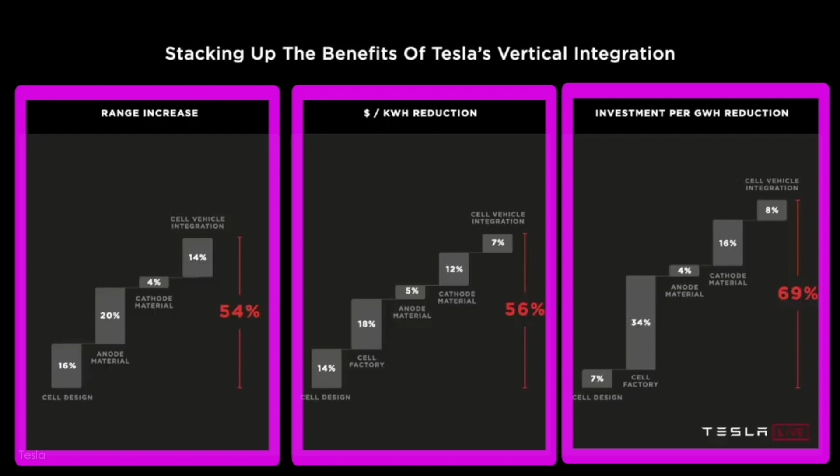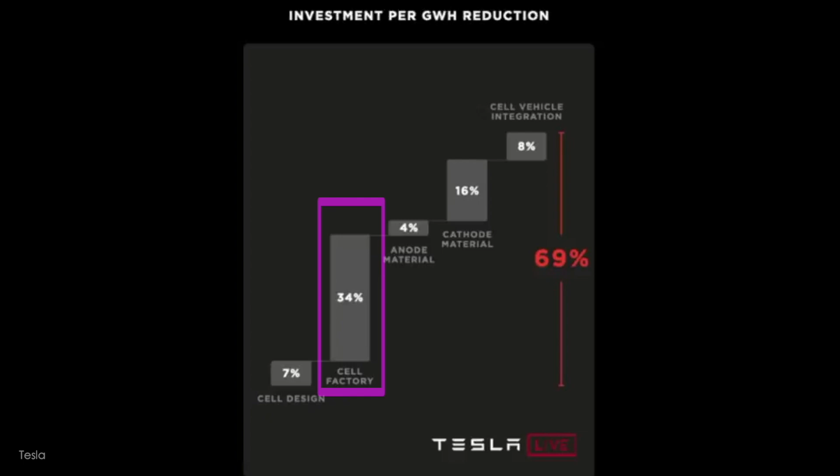But today I wonder how those men and women of 2020 didn't come to understand that Tesla was about to disrupt the energy world by cutting the price of batteries in half, doubling its range, and reducing the investment per gigawatt hour by 69%. This last point, talked about much less, is crucial. With the advances of Battery Day, the investment for new cell factories is over 2/3 cheaper, and the factor that contributes the most to this is the battery factory itself.

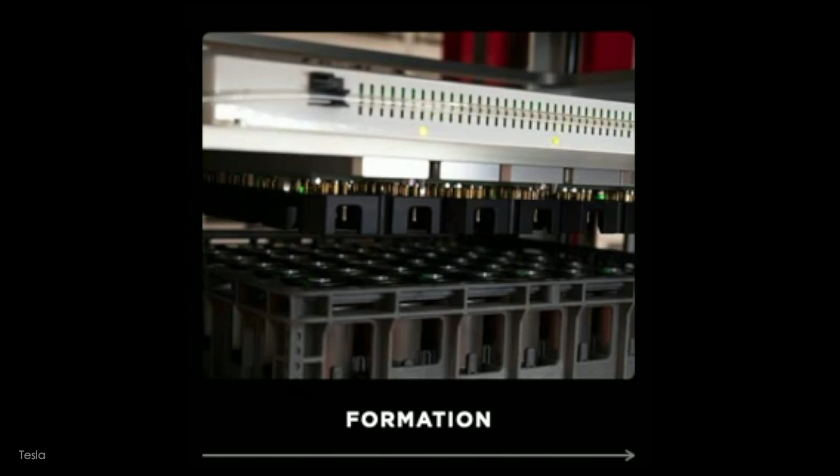In it, the process to make a new cell begins with the manufacture of the electrodes, continues with the winding to roll them, then the assembly, and ends with the formation. This last point, the formation, represents 25% of the investment in a normal factory. Tesla has managed with its breakthroughs in this stage to reduce investment by 86% and reduce its footprint by 75%. How long do you think Drew and Elon talked about this dramatic advance in one of the most important processes in the manufacture of the new batteries?

47. 47 minutes is not that bad. No, Alejandro, no. I mean 47 seconds.

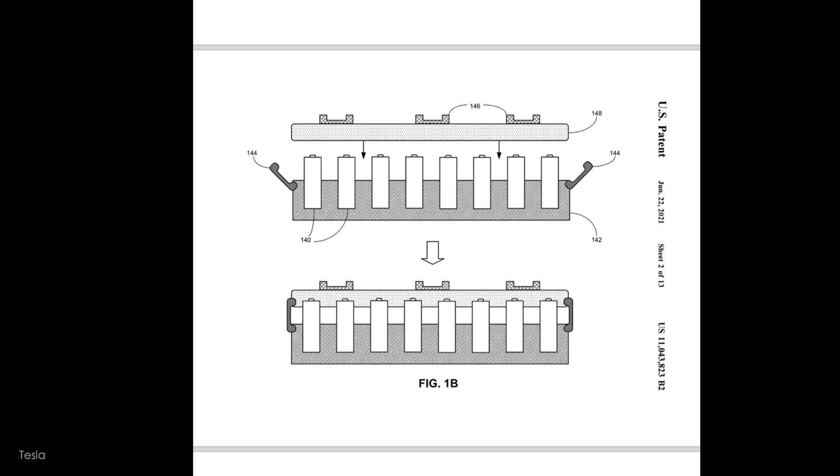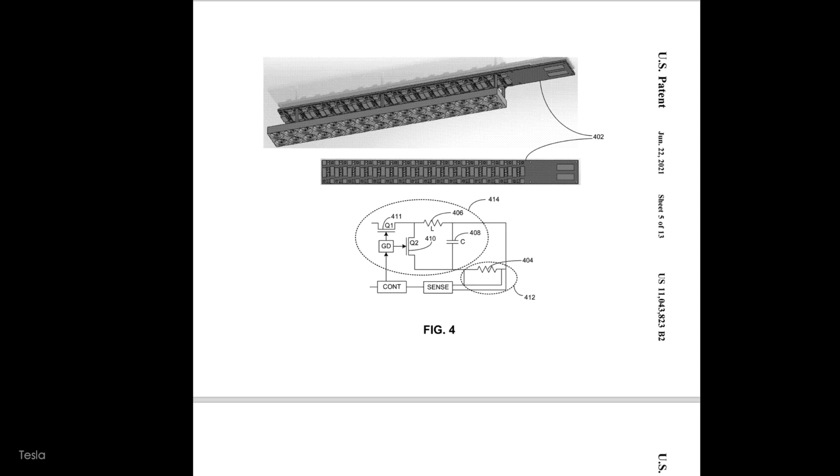In other words, we don't know anything about how Tesla achieves these disruptions. Or rather, should I say, we didn't know anything. Because on June 22nd, 2021, a Tesla patent was made public that explains in detail the incredible improvements that allow these reductions in investment and space. It has taken me such a long time to understand this patent, but I finally succeeded. By the way, since I'm not an expert on this subject, if I've made a mistake, I'm sorry, and please, if you detect it, I would be grateful if you could comment on it.

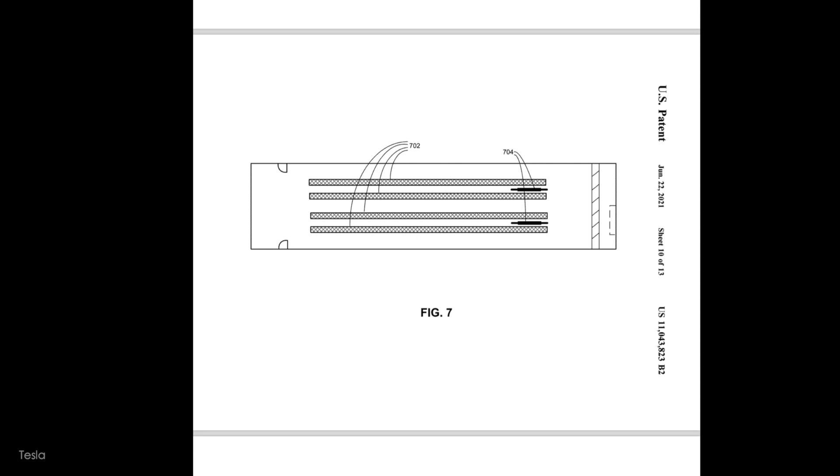In this video, we're going to see in detail the formation patent of the new Tesla 4680 cells, a revolution in the manufacture of the batteries of the future.

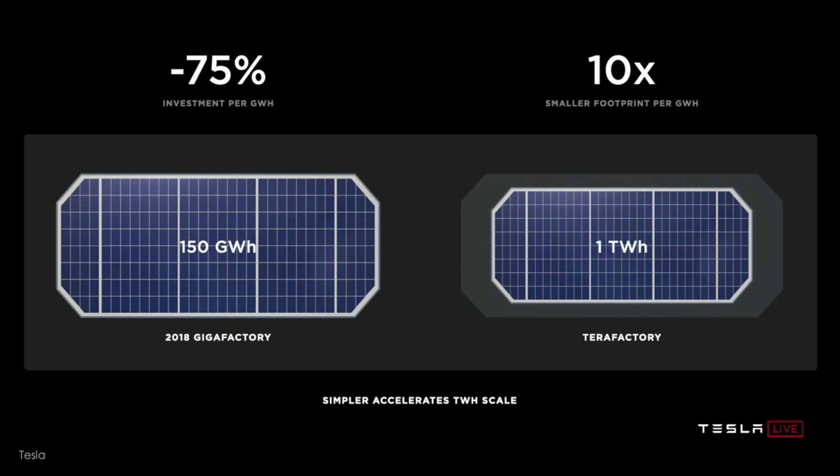It's about a 75% reduction in the investment per kilowatt hour or gigawatt hour. It's basically 4 times better than the current state of the art to the best of our knowledge. And I think there's probably room to improve even beyond that. Definitely, yeah.

We're able to, from a volume standpoint, actually get a smaller form factor than Giga Nevada, and get many times the cell output. So basically, we can get a terawatt hour in less space than it took to make a gigawatt hour, 150 gigawatt hours. So this is pretty profound. I would not have thought this was possible several years ago, that we could actually get to terawatt hour scale in less space than what we currently envision for doing 150 gigawatt hours.

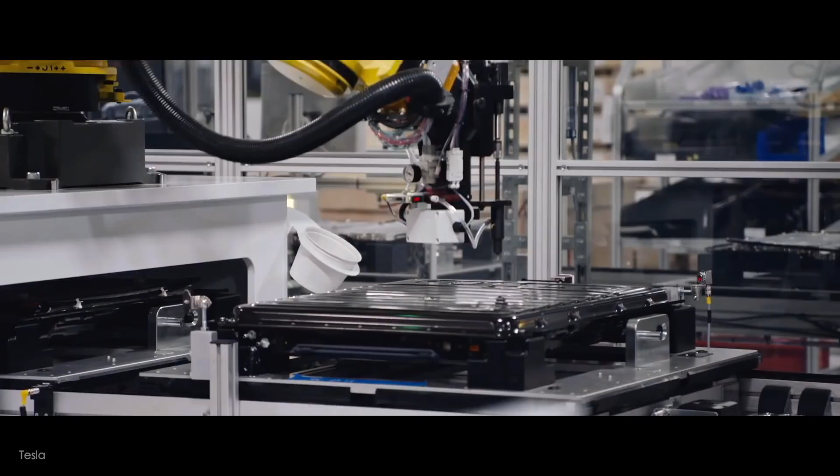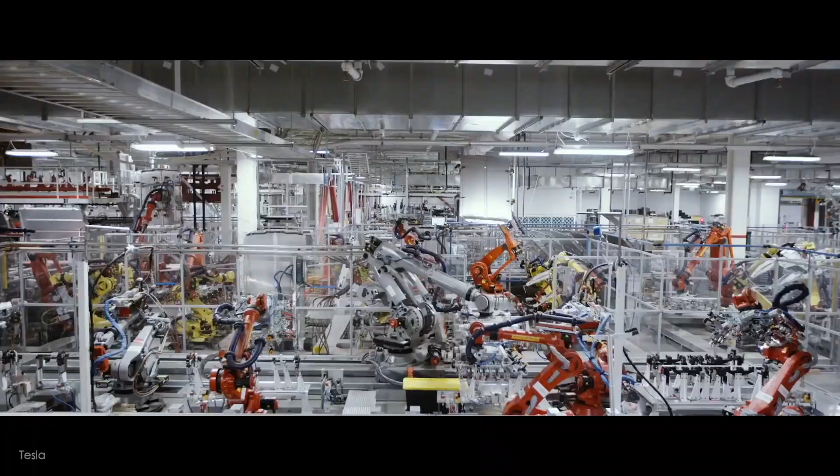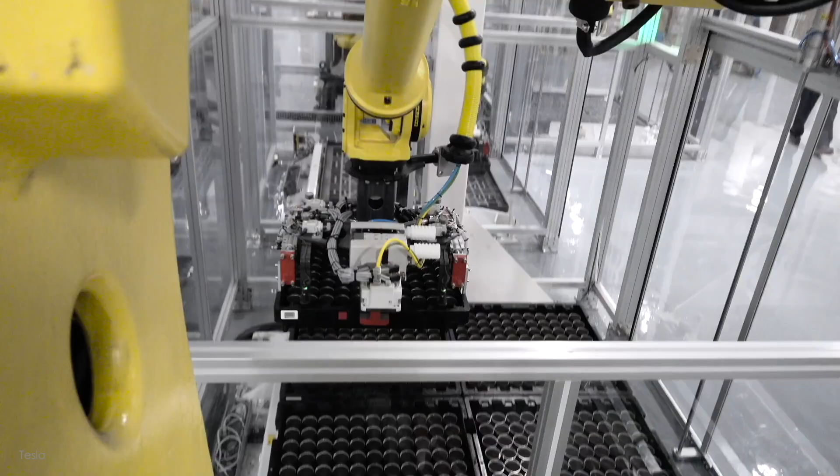What Elon is referring to here is that when the Nevada Gigafactory was built with traditional technologies, it was expected that they could reach 150 gigawatt hours. But now, with the new 4680 cells and their new production processes, in a smaller factory, they can manufacture almost 7 times more. This is because Tesla, to design its new battery factory, thought outside the box and was not inspired by the current battery industry, relatively young, but by industries that had been optimizing for many decades with huge production volume, that is, newspapers and bottles.

However, the speed that Tesla gained in the first steps of manufacturing its batteries was of little use when they arrived to the formation, since for this step the cells have to be stored for about 24 hours.

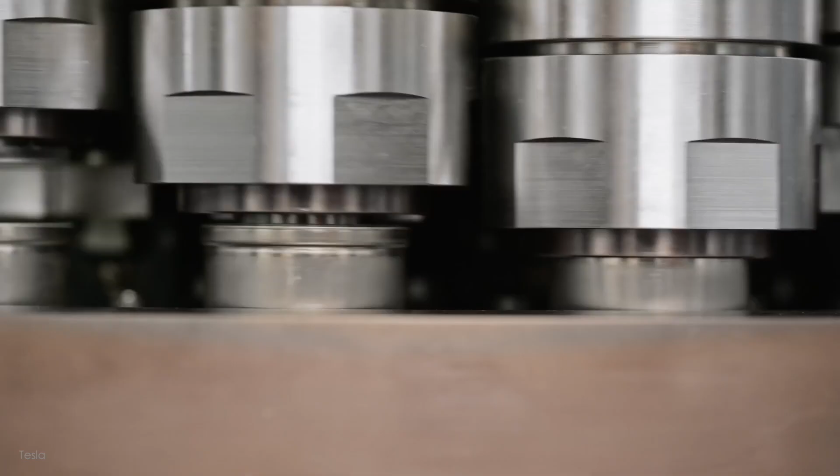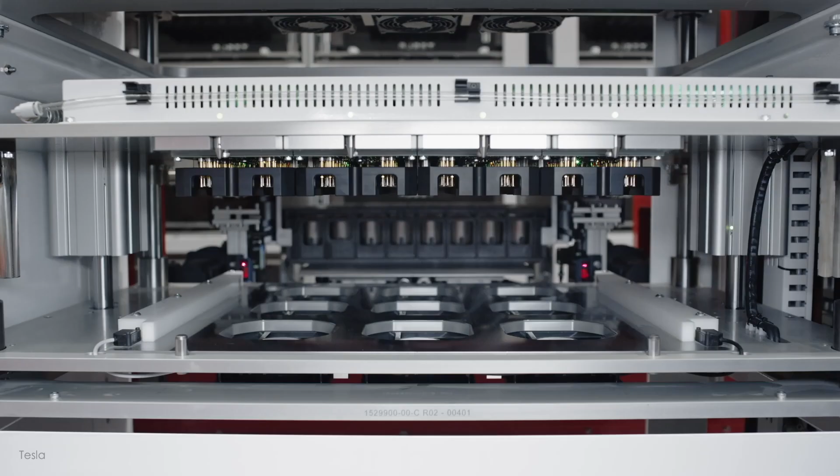But what is this formation? Well, it is one of the last steps in creating a battery cell. When first manufacturing a battery, it is not charged, so the formation is a controlled charge and discharge cycle that activates it. This process also serves two more functions: detecting cells that do not meet a minimum quality standard to be used in a battery pack, and the creation of the SEI, solid electrolyte interphase, which is no more than a protective layer on the anode.

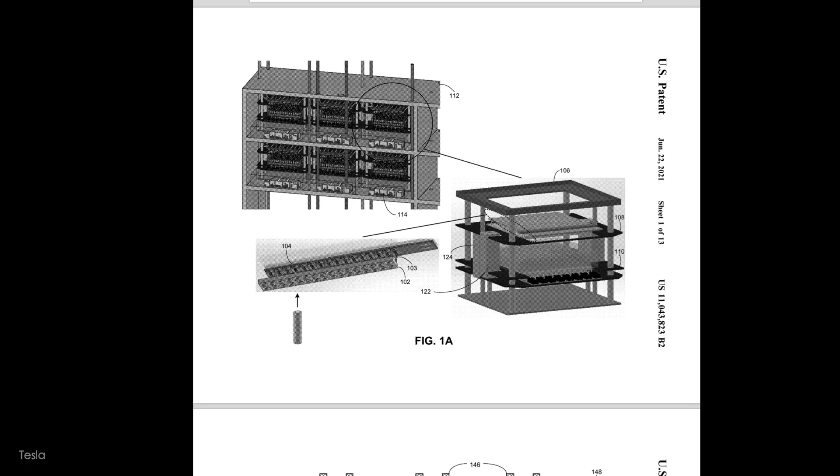So how does Tesla improve such an important process? In the patent that I leave you in the description, there are many advances that I recommend you read carefully, but I have grouped them into three large fields.

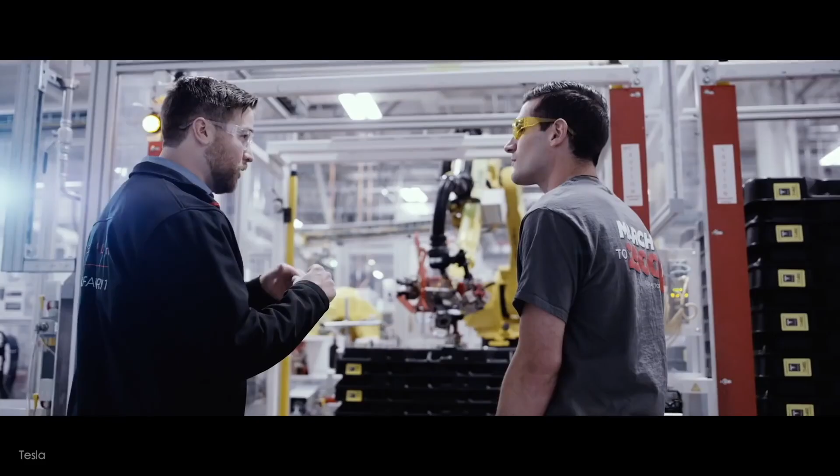First one, less material. In the same way that the first Model S had 3 kilometers of cables, then only a few years later it came down to 1.5 kilometers in the Model 3, and there's already a patent to reduce it to 100 meters, Tesla is obsessed with reducing materials as much as possible.

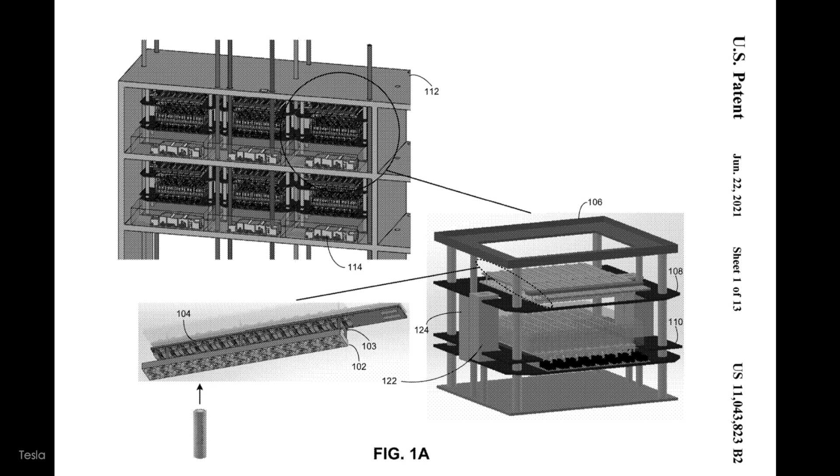In the case of formation, it is also cables that can have up to 4 per cell, which is tremendously inefficient. You just have to look at figure 10 of the patent, in which it's clearly seen how the drawing on the left, which is a diagram of the conventional system, needs much more extensive wiring because they use a parallel system, while Tesla's is a series one.

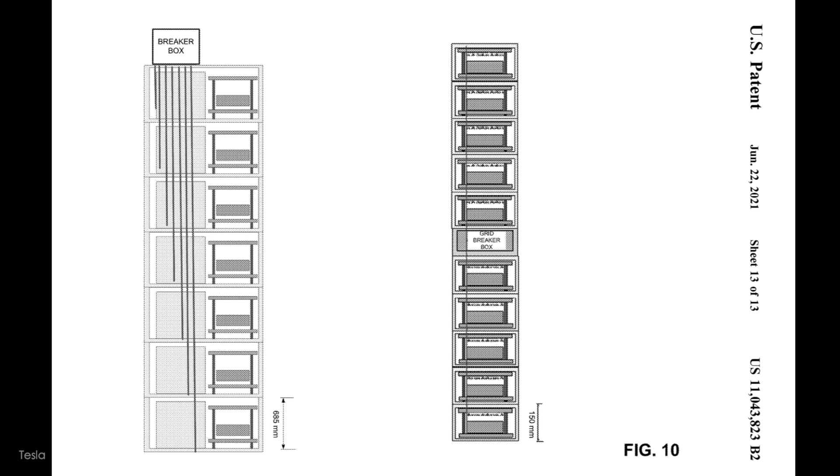But this savings is not reserved to the cables, as explained by the patent itself. On the left is a conventional cell-forming system, which requires a separate power supply unit for each group of cells. The present inventive system, as shown on the right, only needs one power supply unit for a number of clamshell structures, each of which can accommodate 256 cells.

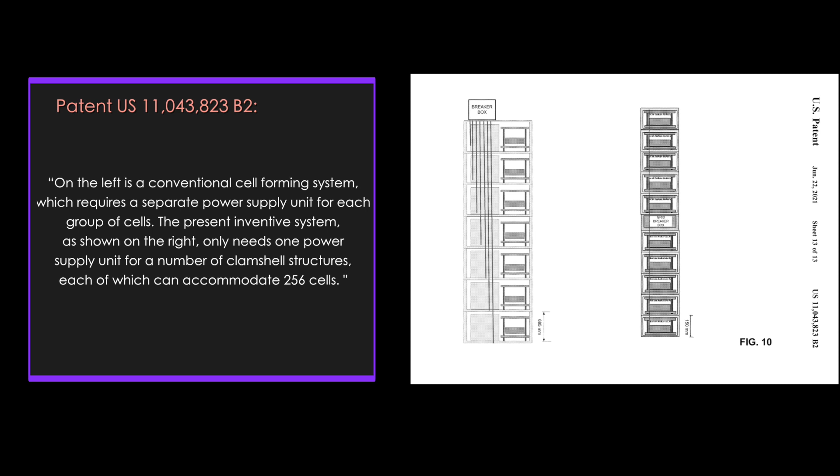And this means that with these material savings, we can move on to the second major field, which is less space. Tesla manages to compact its systems, avoiding redundant procedures, as the patent states.

Figure 9 shows a conventional power supply chain. In contrast, as shown in the bottom of Figure 9, embodiments of the present invention utilize an AC-DC conversion unit to directly convert a 277-volt AC power to a 50-volt DC power.

This 50-volt DC power is then shared among the clamshell structures housed in a rack. Or if we translate it to human language, with traditional systems, a substation is needed for every 256 cells, while with Tesla's, a substation serves 1280 cells and also saves several steps.

But this productivity improvement due to a reduction in space is not new. Elon Musk has been obsessed about it for years, but lately, this obsession is starting to pay off.

The rear body castings for Model Y allowed us to reduce the body shop by 30%. There's roughly 1,000 robots on the Model 3 body line, which, by the way, is also not a figure of merit. You want fewer things, not more. We got rid of 300 robots just with that rear body casting. And then when we go to the front body casting, we're getting rid of another 300 robots.

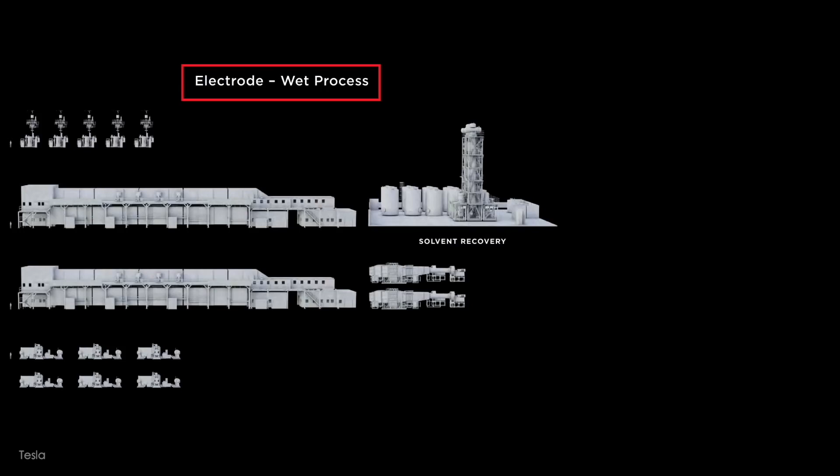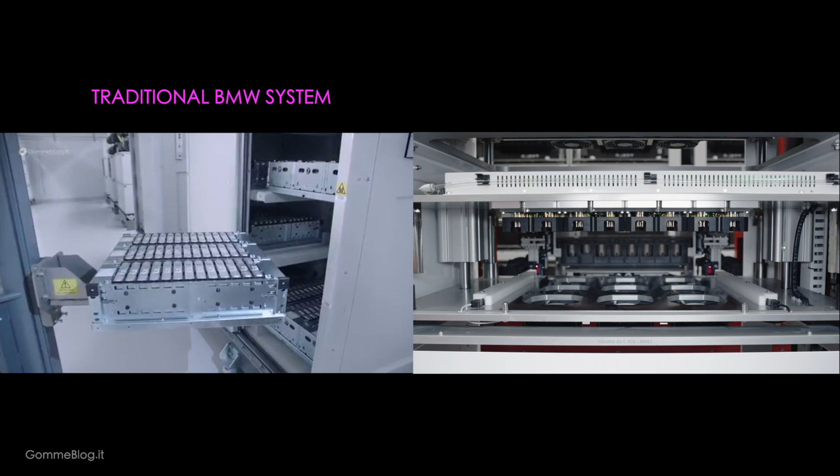However, it's not necessary to go to the chassis to detect these improvements. In the same manufacturing of the cells with their dry battery electrode technology, they have gone from this to this. So now I want you to pay attention. In this formation process, look at the difference in space between groups of cells. This is a conventional process for a production of BMW cells, and this is Tesla's system, much denser.

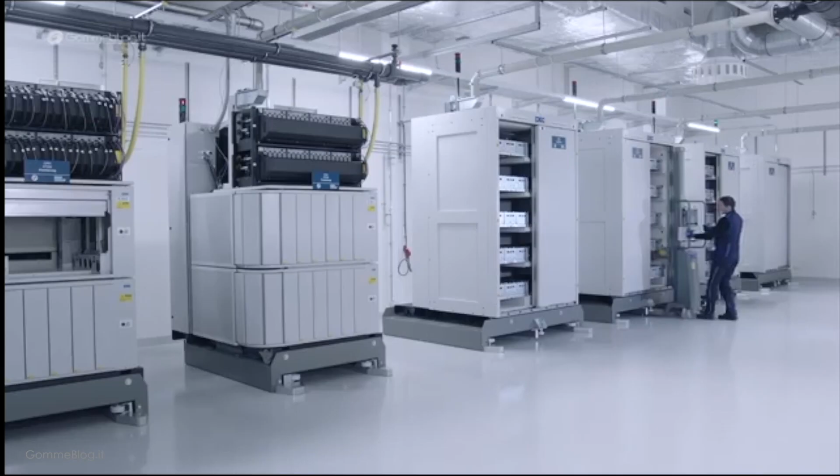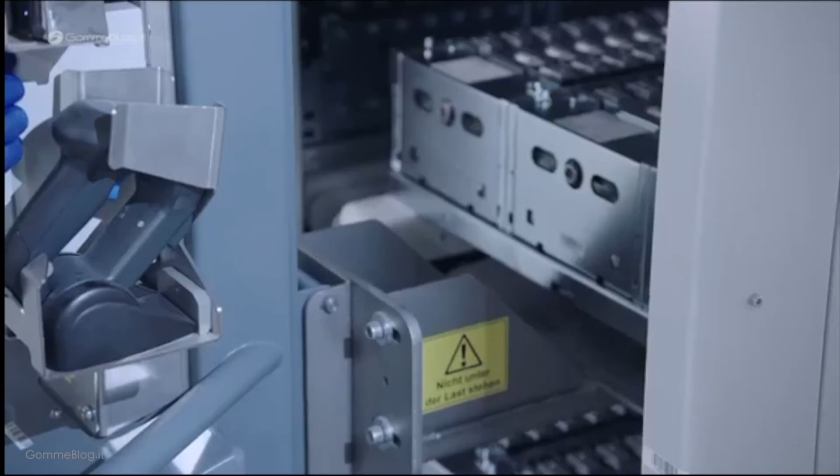But of course, in this desire to optimize space, if you have noticed, there is a huge waste, and it's the corridors that are needed for the operator to carry the cells. As I said at the beginning of this video, Tesla is not trying to optimize what the legacy industry is already doing, but is looking elsewhere for inspiration. And these corridors could not be any exception, as the patent explains. These shelves can be placed on tracks and be moved as needed like bookshelves in a library.

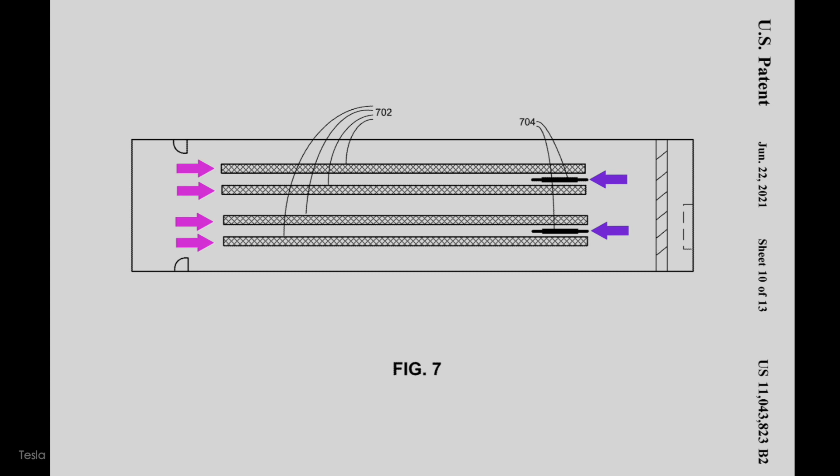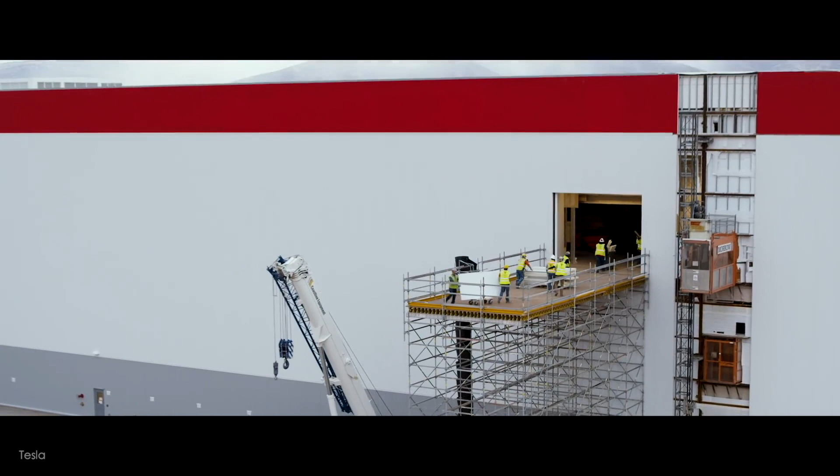This same passion for optimization has led Tesla to want to save space in a very important system in this process: air conditioning. This installation takes a lot of space since the cells have to be at a certain temperature, and Tesla with its new production system has managed to reduce it to a minimum. But how? Well, with the third and final field of improvement: more efficiency.

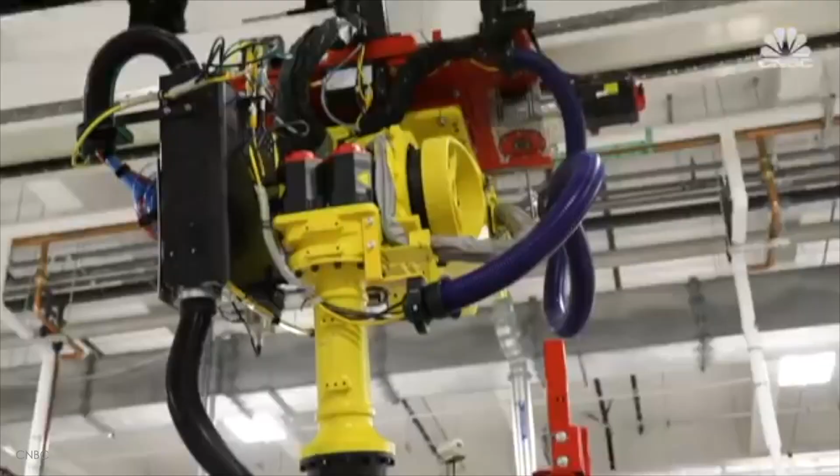The existing formation system uses air cooling to transfer heat generated by inefficient power usage, which in turn consumes power to remove heat, takes up space, and is difficult to control without significant thermal gradients, resulting in cell-to-cell variation. In short, a lot of heat is generated due to too much wiring, and the air conditioning system is not very efficient. As we have seen in the first big field, Tesla dramatically reduces wiring.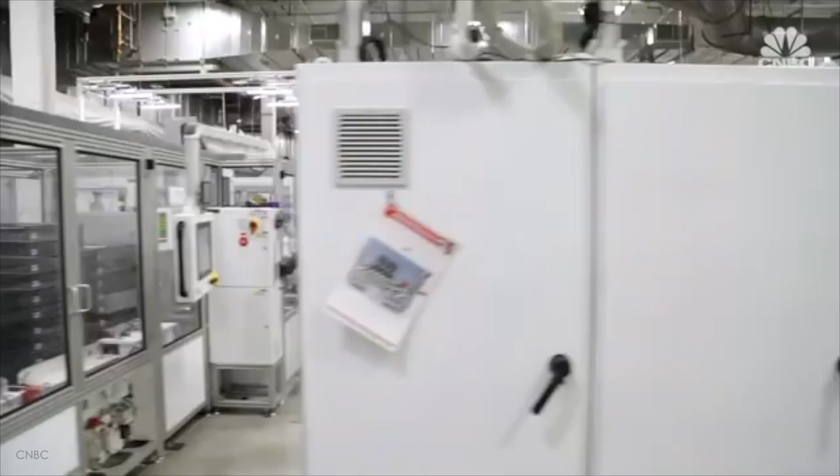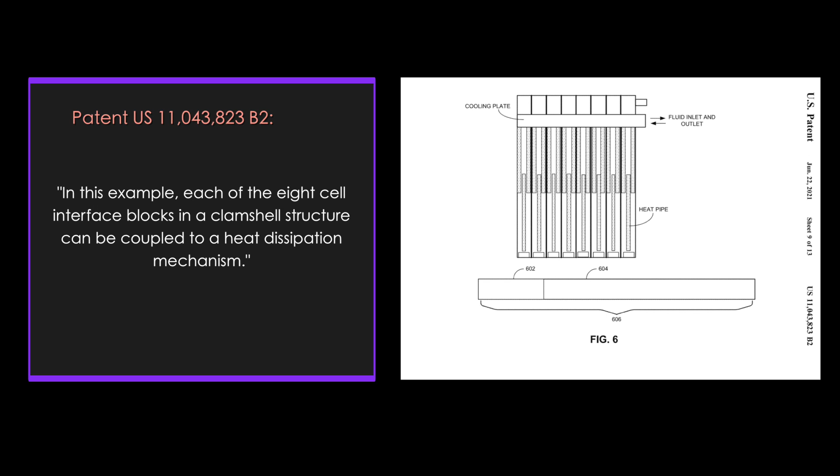But what about its thermal control? Instead of cooling the whole room, they use an ingenious heat dissipation system. In this example, each of the eight cell interface blocks in a clamshell structure can be coupled to a heat dissipation mechanism. What this means is that Tesla goes to the heat source, capturing it from the cell itself and redirecting this heat where it's most needed.

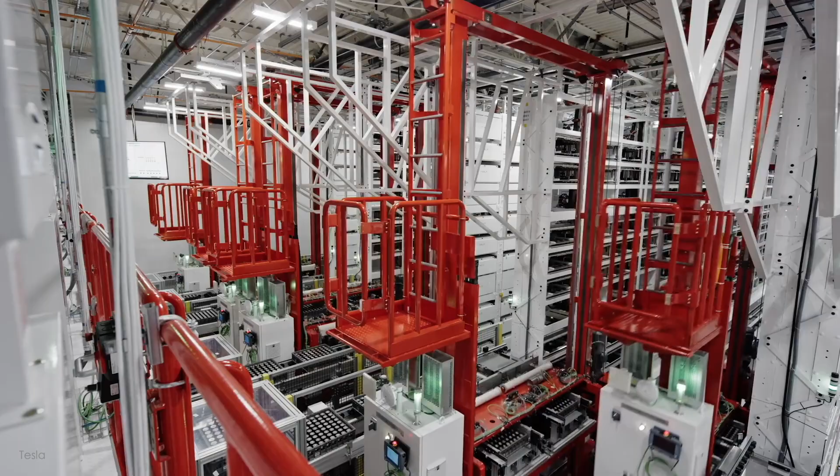This strategy of moving resources is also used with electricity. In the formation process, in which cells have to be charged and discharged, the traditional system lost this charge. However, Tesla combines the discharge of some cells with the charge of others, and thus no electricity is lost.

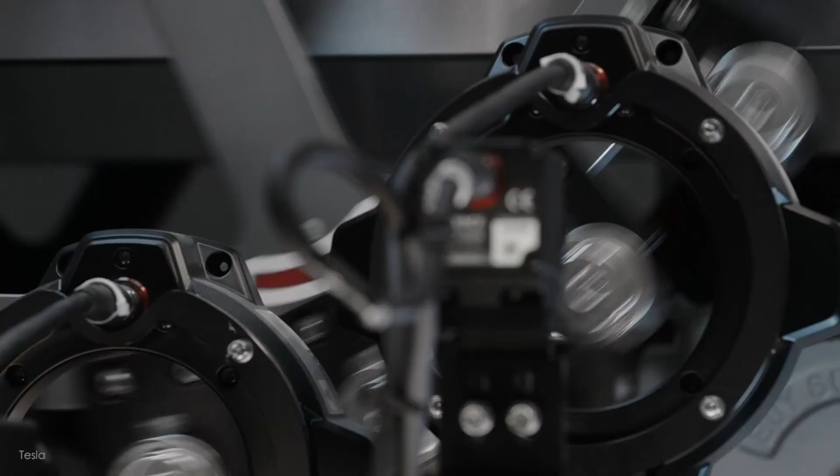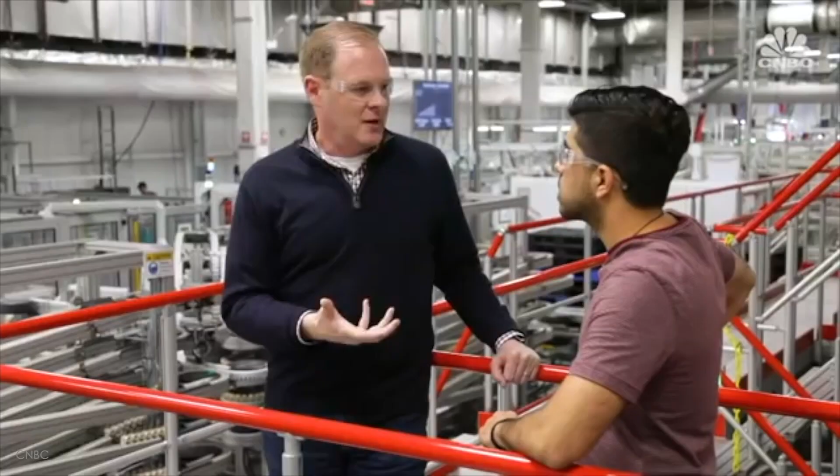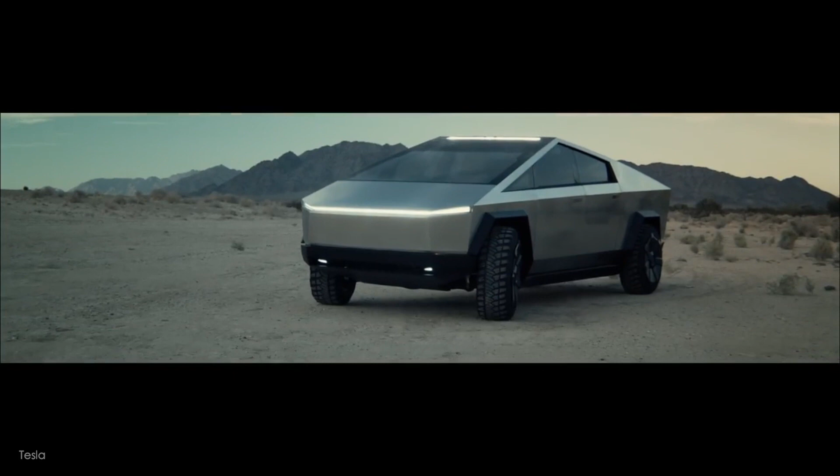Therefore, Tesla has reinvented this fundamental stage in the manufacture of its new 4680 cells, and has done so thanks to two very powerful weapons. First, its holistic vision of manufacturing: Elon Musk's company thinks about the finished car, and from there they design and manufacture their parts and processes, while most companies think about the parts and processes that they can outsource and put together to get the final vehicle. The second reason is that to get each of these parts of these products, they have a very different approach than most companies.

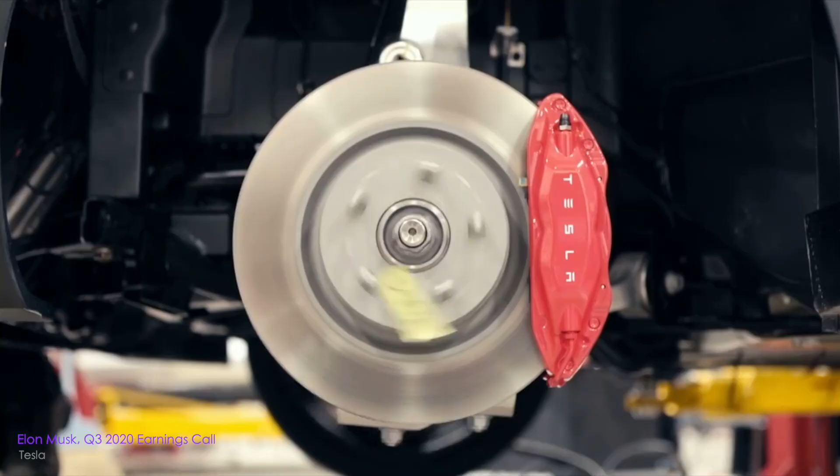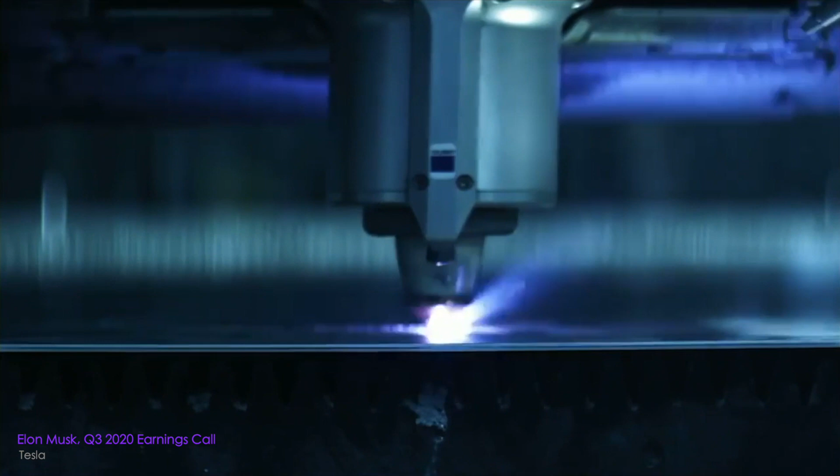Tesla is absurdly vertically integrated compared to other auto companies or basically almost any company. We have a massive amount of internal manufacturing technology that we build ourselves. We literally make the machine. In fact, we design it—it's like, okay, what is the thing we want to make? Design the machine that will make that thing. Then we make the machine.

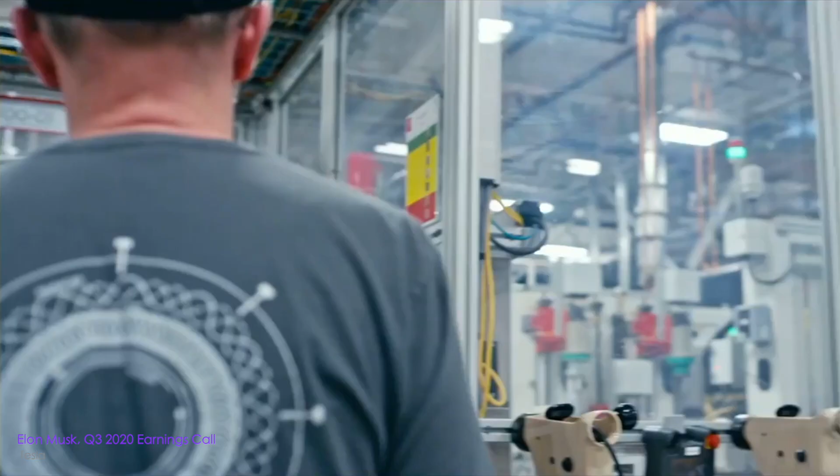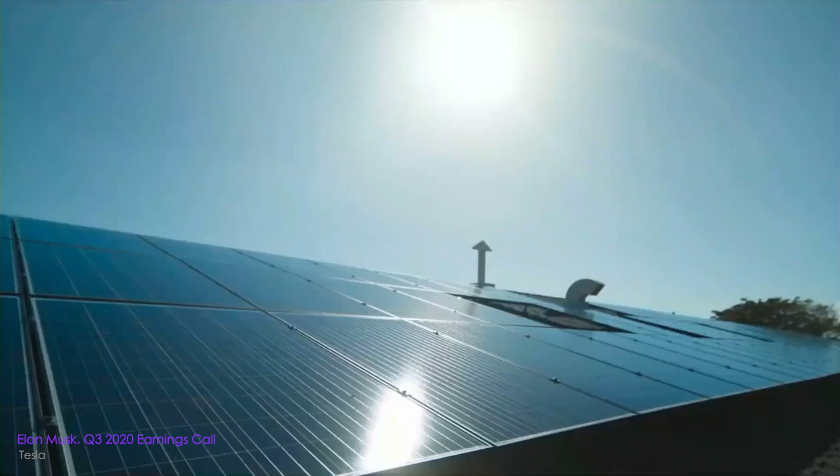This makes it quite difficult to copy Tesla. We're not actually that opposed to people copying us, but it's quite difficult because you can't do catalog engineering. You can't just pick up the supplier catalog, get one of this machine, one of that machine, bingo, I'm Tesla. There is no catalog. So we made the machine that made the machine that made the machine.

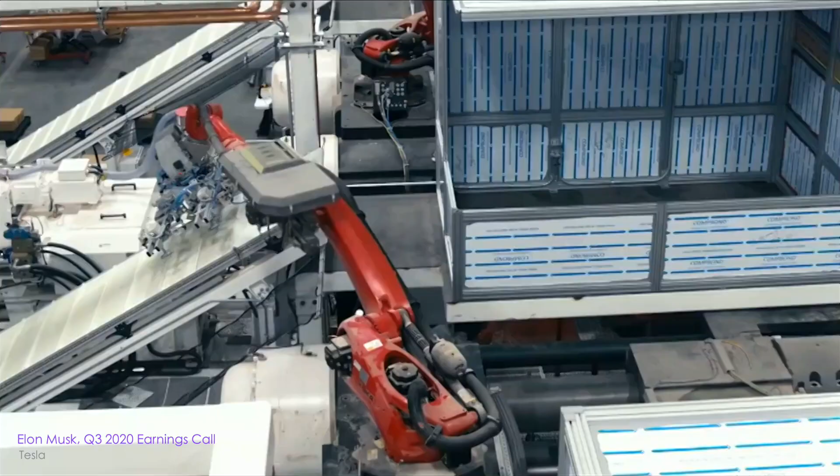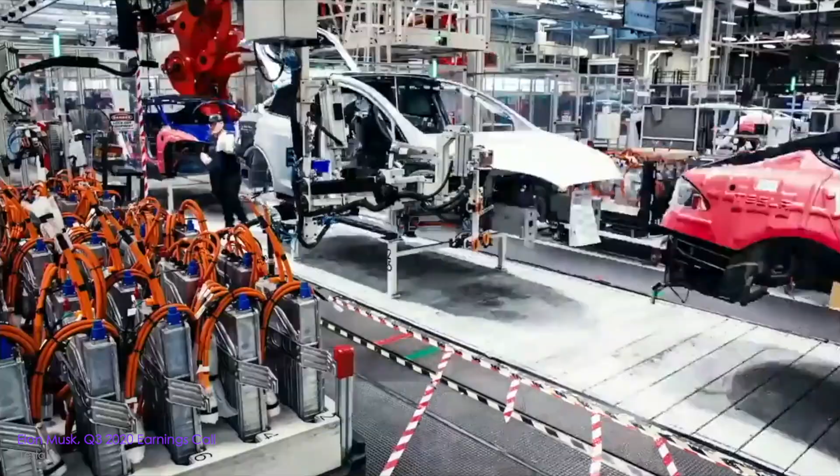We don't want to get carried away here, but quite frankly, we would like to outsource more. That would be great, because then if we could take something we're doing and outsource it, we could take those people and have them do something else. It's like we just make a crazy amount of machinery internally.